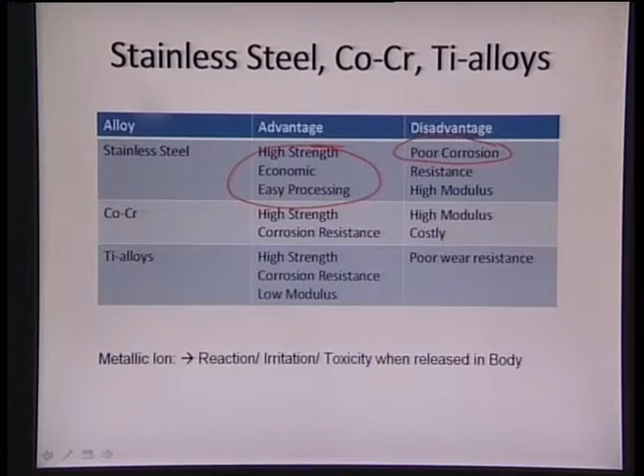As we realized earlier, stainless steel has high strength, is economic, and easy to process, but it has very poor corrosion resistance. That's why we went to cobalt chromium alloys, which have good strength and high corrosion resistance, but are costly and still have very high modulus. If a material has very high modulus, the bone will start thinking it doesn't need to be there, and it will start getting reabsorbed into the body.

So we want a material with a little lower modulus, and that is sufficed by titanium alloys. They provide a good combination of high strength, good corrosion resistance, and low modulus. But the only problem with titanium alloys is that they have very poor wear resistance.

To counteract the poor wear resistance, titanium alloys generally need to be supplied with some sort of surface coating. The surface coating takes care of the wear part, enhancing the surface wear resistance of the titanium implant.

We can also apply a coating that is much more biocompatible in nature, to assist bone integration onto the titanium surface. This coating can be more ceramic in nature, such as hydroxyapatite.

Once the hydroxyapatite-based ceramic coating is applied onto the titanium implant, it can take care of the lower wear resistance of titanium and impart much superior wear properties. It can also provide a base for cells to grow, adhere, and proliferate on the implant surface.

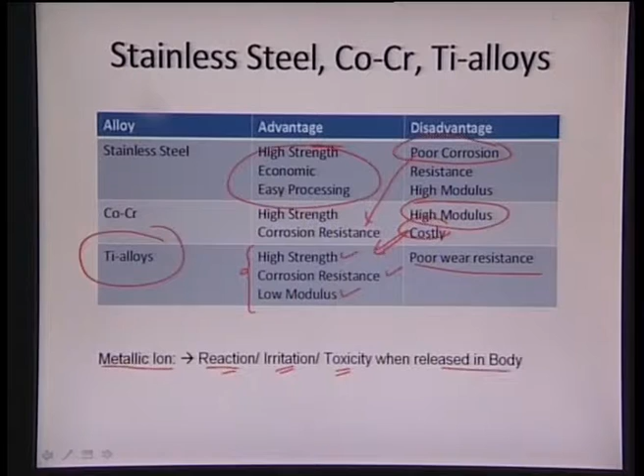There is one more problem with the titanium alloy Ti-6Al-4V: it has a metallic ion concentration that can react, irritate, or induce some toxicity when released into the body. So to eliminate or reduce the effects of this ion release into the body, again ceramic coatings can come to the rescue.

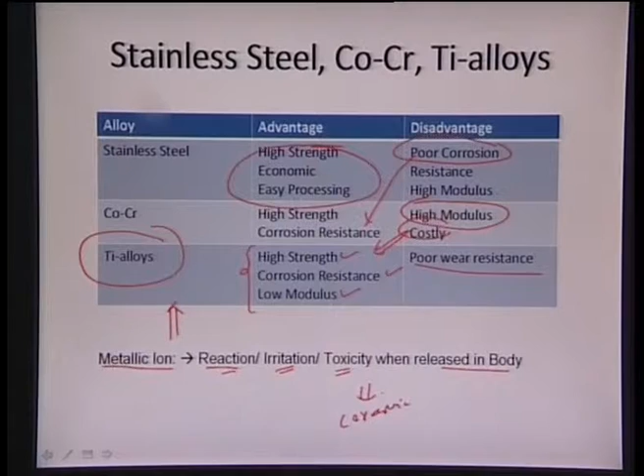Ceramic coatings act as a barrier, and they don't allow the ions to flow easily from the implant surface to the surrounding tissue.

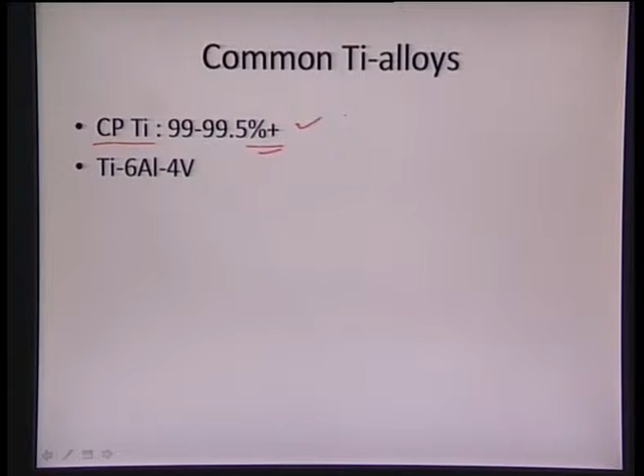The two very common titanium alloys predominant in the medical industry are commercially pure titanium, which is approximately 99% to 99.5%-plus purity, widely utilized in the biomedical industry, and a combination of titanium with 6% aluminum and 4% vanadium, called Ti6Al4V, or Ti6-4 for ease of use. These are the two most commonly used titanium alloys in the biomedical industry.

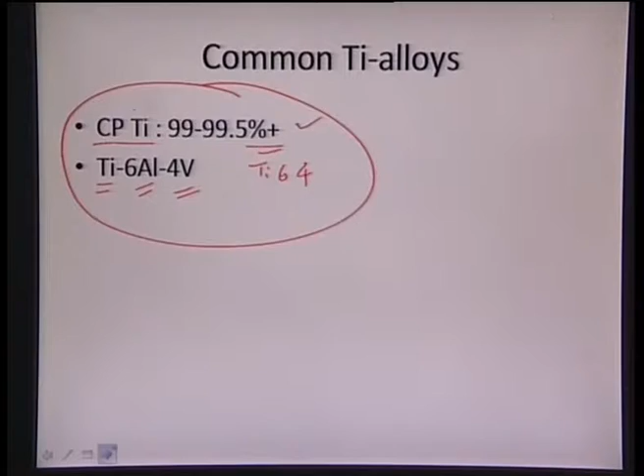Coming to the microstructure, pure titanium is basically HCP, and the phase is called the alpha phase. So pure titanium is more of a single phase material, and it's HCP. Owing to the limited HCP slip planes available in an HCP crystal, it has very limited processability due to the limited number of slip planes, so it is generally very difficult to process as such.

This titanium alloy is generally cold worked to achieve grains in the order of 10 to 150 micrometers in size. Ideally, we can get a single phase structure in titanium alloy, and to induce more strengthening, we go with cold working—approximately 30% cold working is given to the titanium alloy to achieve grains of 10 to 150 micrometers in diameter.

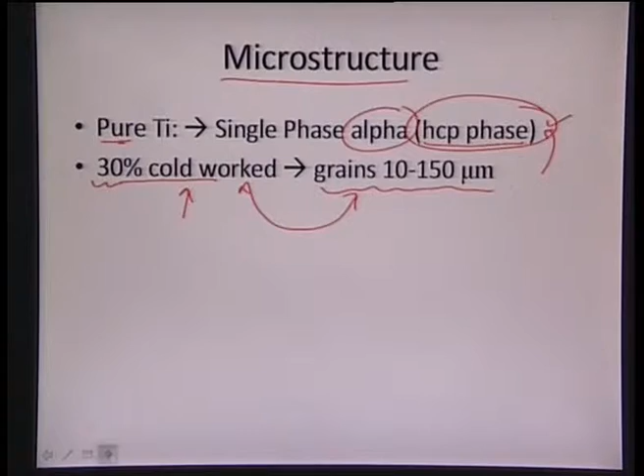There can be addition of secondary interstitials into the titanium, which can be oxygen, nitrogen, or carbon. They go into the interstitial sites of the titanium, giving various combinations. There are certain grades that differentiate the titanium alloy.

These grades go from grade 1, grade 2, grade 3, grade 4, depending on the oxygen content in the titanium alloy. Oxygen can be from 0.1 to 0.4 weight percent, nitrogen up to approximately 0.05 weight percent maximum, and carbon up to 0.10 weight percent into the titanium alloy. The function of all these interstitials is to achieve interstitial solid solution strengthening.

So we can see that once carbon, oxygen or nitrogen sit in the interstitial sites, they induce solid solution strengthening of the titanium alloy. It has also been observed by researchers that nitrogen shows approximately double the effect of either oxygen or carbon. So if nitrogen sits in the interstitial, it will provide much more strengthening effect in comparison to oxygen and carbon.

But at the same time, we can add maximum nitrogen of around 0.05 weight%. So this is the overall effect of the interstitials: oxygen, carbon and nitrogen sit in the interstitial sites, and nitrogen shows approximately double the effect of oxygen or carbon in providing interstitial solid solution strengthening.

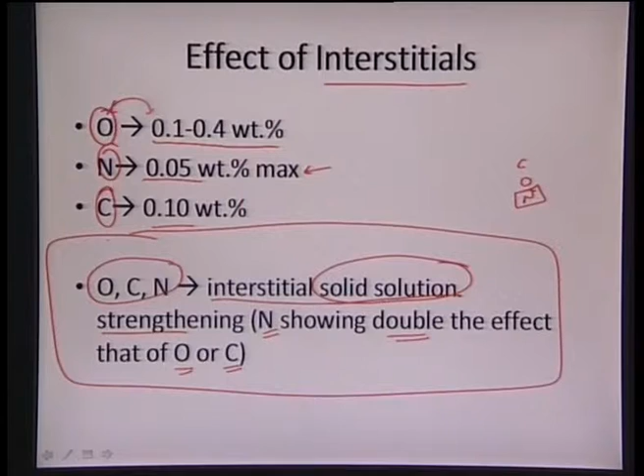Oxygen is also very predominant in terms of enhancing the mechanical properties. If we increase the oxygen content from 0.18 to 0.4%, the yield strength will increase dramatically from 170 to 475 MPa. So approximately more than 2.5 times improvement can be shown in yield strength just by doubling the oxygen content. That is the approximate dependence of oxygen content in the interstitial. So once we have titanium, if we start inducing oxygen to a larger percentage, it will enhance the yield strength.

At the same time, if we increase the oxygen content from 0.085 to around 0.27 weight%, we will also see an increase in the fatigue strength, increasing approximately from 88 to 216. So it is also showing that if we increase the oxygen content approximately double or triple, the same type of effect we can see in the fatigue strength as well.

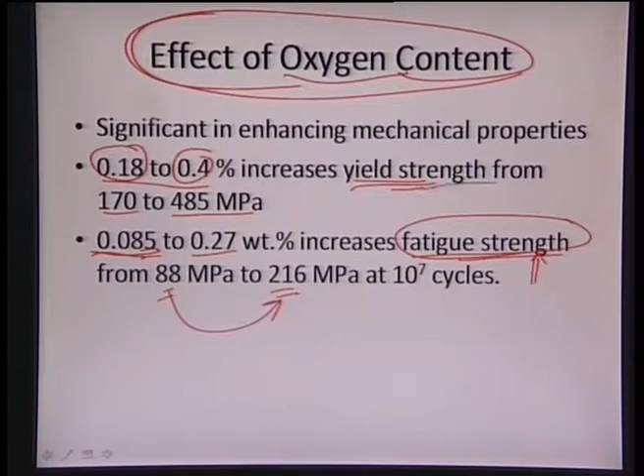So we can realize that higher oxygen content is much useful in terms of increasing the yield strength, and at the same time increasing the fatigue strength, because those sites act as high energy regimes, and it becomes difficult for slip to occur, which basically provides an increase in the yield strength or the fatigue strength of the particular titanium alloy.

The corrosion resistance in the titanium alloy comes because of the presence of this titanium oxide layer. This titanium oxide layer provides a barrier for the surface to interact with the titanium implant, and it is responsible for rendering the corrosion resistance at the tissue level.

Because of its similarity, it can allow cells or tissues to grow on its surface without inducing any toxic effects. That biological compatibility is available even at the molecular scale or even at the tissue level, so that tissues find a very friendly environment on the titanium oxide surface, because it is no more titanium - titanium is basically covered with an impervious layer of titanium oxide.

So there is no release of titanium ions through this titanium oxide, and the titanium oxide is much more bio-friendly. It's very bio-inert in nature, and does not induce irritation or toxicity effects into the cells or tissues. So cells and tissues find a very comfortable environment in terms of their adhesion, their growth, and their proliferation.

So that is the advantage we achieve from the titanium oxide layer: it imparts much corrosion resistance even in very severe body fluid environments, and it can also impart much biological compatibility both at the molecular level as well as the tissue level.

Researchers Kasemo and Lausmaa also found that titanium oxide assists osseointegration in oral and maxillofacial implants. So that is also observed about titanium oxide, that it is much more bio-friendly in nature, and it allows osseointegration in oral and also maxillofacial implants.

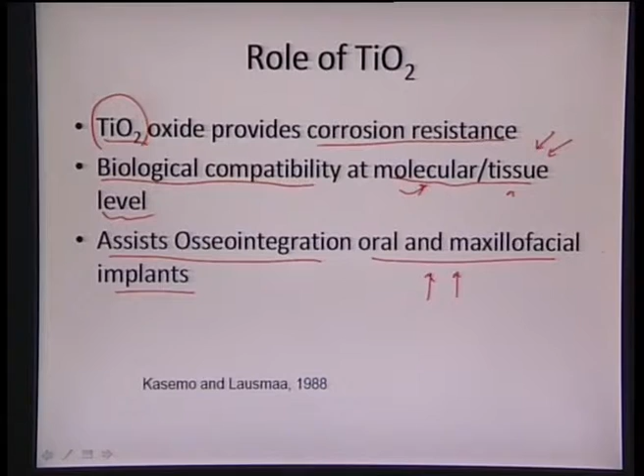Coming to the titanium alloy, generally titanium itself is not that strong in nature, so it also needs certain reinforcement, because titanium is a single phase material. If we start making it a dual phase material, instead of having only the alpha or HCP phase, and induce a secondary phase, we can also get strengthening from the secondary precipitate, because it will impart impediment to the dislocation motion.

It can also generate some new slip systems which can be available for the slip to occur, and in that manner it will enhance its ductility. So the processing part is basically enhanced, and at the same time the strength part can also get enhanced because of the dual phase microstructure.

So in the titanium alloy, we have base as titanium, and generally this is called titanium 6 aluminum 4 vanadium. We generally see aluminum between 5.5 to 6.5%, vanadium between 3.5 to 4.5%, and we have some secondary reinforcements as well, such as iron, carbon, oxygen, which also impart strengthening in terms of increasing either the yield strength or the fatigue strength.

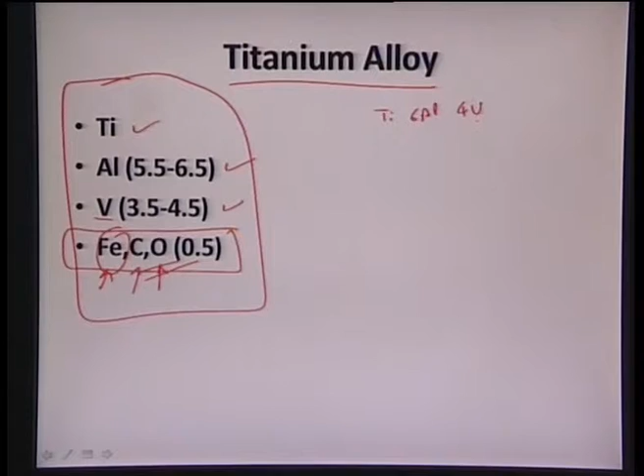So that part can also be achieved from interstitials such as carbon and oxygen. We can also have other reinforcements such as iron, nickel and so on. But overall this titanium alloy is also called titanium 6 aluminum 4 vanadium. It is a very popular material as a biomedical implant material, consisting of aluminum around 6%, vanadium around 4%, and the rest being carbon, oxygen and so on.

As said earlier, the role of additions go on to titanium 6 aluminum 4 vanadium. It forms a dual phase microstructure. Alpha comes basically from the titanium part. At the same time, alpha is also being stabilized by aluminum, so aluminum acts as an alpha stabilizer, rendering the HCP phase much more stable. But the presence of vanadium helps in forming a beta phase. So titanium 6 aluminum 4 vanadium is a combination of alpha plus beta phase.

Instead of having a single phase like in case of pure titanium, which was only alpha, in this case we have a dual microstructure. We see certain pockets are only beta, so we can see alpha plus beta regions, this is beta and this is again alpha.

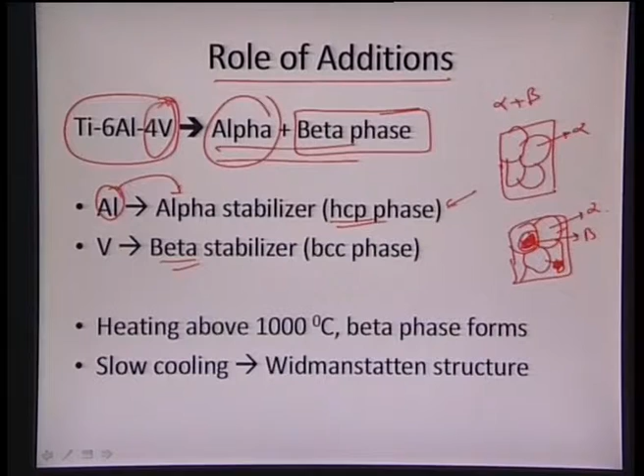This dual phase microstructure assists in achieving even higher strengths and very high fatigue strength. That is the advantage of inducing secondary alloying elements such as aluminum and vanadium, to impart much more increase in the yield strength and fatigue strength of a titanium alloy.

One more thing that happens with titanium 6 aluminum 4 vanadium is that once we heat it above 1000 degrees centigrade, we see the formation of beta phase, because beta phase is stable at higher temperature. So above 1000 degrees centigrade, we'll see a microstructure that is 100% beta.

Once we start cooling it very slowly, the material is basically retained at very high temperature for a long time and cools down very slowly. So there is much more increase in the grain size. That is the problem with slower cooling, we tend to see something called the Widmanstätten structure.

In the Widmanstätten structure, we basically have a structure like this. I'll draw it here: initially we have only beta grains once it is heated at higher temperature, greater than 1000 degrees centigrade, completely 100% beta. As soon as we start cooling it down slowly, we observe increased grain size, and after a certain temperature below 1000 degrees centigrade, we see the nucleation of alpha phase as well.

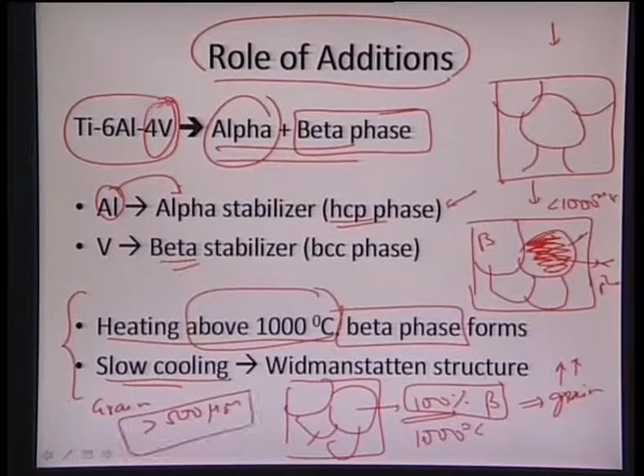So though it has certain advantages in terms of its additions, this slow cooling induces some deleterious effects in this material, and the grain sizes can basically be more than even 500 microns. At this particular grain size, the mechanical properties will be very inferior because of the Hall-Petch relationship, since our grain sizes are on the order of more than 500 microns.

So the overall mechanical properties, such as yield strength, will be very inferior. That is the overall negativity which can be induced just by processing itself, because we are taking the material to very high temperature, more than 1000 degrees centigrade.

We are letting the beta stabilize, and then we allow the alpha phase to form in equilibration. We do a very slow cooling, and because of that the grain size extends to a very huge extent, maybe up to more than 500 microns. This nucleation causes HCP phase to form, which is alpha, which is more like a needle-like structure, and that induces this negative effect.

So we can see this Widmanstätten structure. It is basically the HCP alpha phase, which is aluminum rich, and when depleted in the vanadium part, it starts precipitating as a plate or needle.

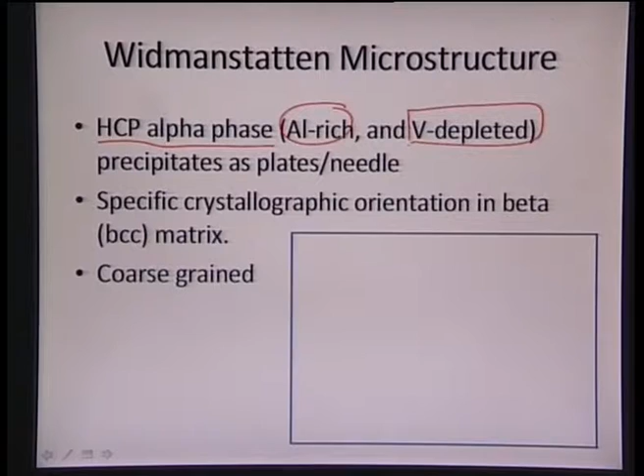So we see that we had grains like this for the beta, and then we see the nucleation of this alpha phase, which can start nucleating within like this, and then we have this beta phase, and again we will see alpha phase nucleating, because alpha phase will be much more stable at less than 1000 degrees centigrade.

We will see more grains which are forming alpha now. So we will have much more regions which have started forming alpha, and then the original beta regions which were present because we had taken the material above 1000 degrees centigrade. So this is the initial beta, and then we start seeing the formation of alpha structure.

This alpha is much more needle-like, and that induces specific crystallographic orientation in beta. So this alpha is forming by precipitating in particular crystallographic orientation. That is the reason it comes more like a needle-like structure, forming within the beta grain. So we have alpha getting precipitated in certain directions of the beta phase.

So that's what is being observed here, and it is again a coarse grained material because the material has stayed for the whole heat treatment for a couple of hours. So that is the problem with this particular material.

We are taking it to very high temperature, letting it stay there for much time, and then doing a very slow cooling. That is the reason the material undergoes higher thermal exposure for a very long time, and that is the reason the grains remain very coarse.

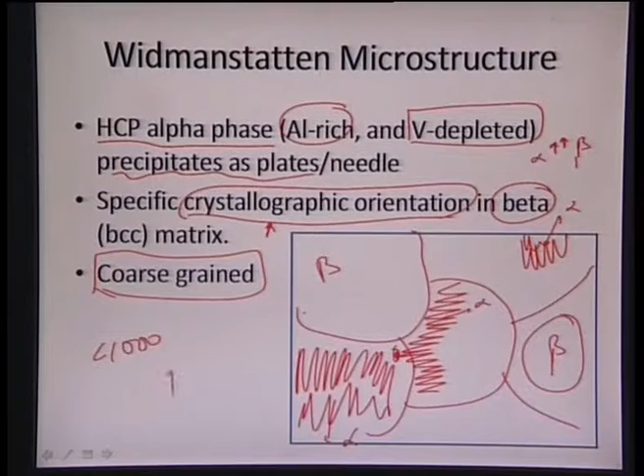So to avoid that particular part, what can be done? We can do a rapid cooling, which basically induces martensitic or bainitic type solid state transformation, and since we have very rapid cooling, we can also achieve a very fine microstructure.

So that is the advantage with this rapid cooling: instead of a very coarse Widmanstätten structure, we are seeing a martensitic or bainitic type solid state transformation. At the same time we are able to achieve a very fine microstructure, so we are not staying at the high temperature regime for very long time.

So temperature is not high anymore, we are doing a very rapid cooling. We go to in excess of 1000 degrees centigrade, but we cool the material very rapidly, and that rapid cooling induces martensitic or bainitic type solid state transformation, and again rapid cooling also induces very fine microstructure.

And again the alloy is heated or cooled below the beta transition. So we are not letting this material go above 1000 degrees centigrade, we let this transition happen below 1000 degrees centigrade. So we are heating the material to less than 1000 degrees centigrade.

So we don't allow the beta to form completely. Once beta is not formed completely, rapid cooling can induce martensitic or bainitic type transformation, and at the same time we are not allowing the grains to get coarsened. So grains remain fine and are retained as such.

So we are not letting the grains get coarsened, because we are basically heating them much below 1000 degrees centigrade, and then they are annealed to give a very fine microstructure. In this particular case, we have isolated beta in alpha matrix. So that is what is happening now.

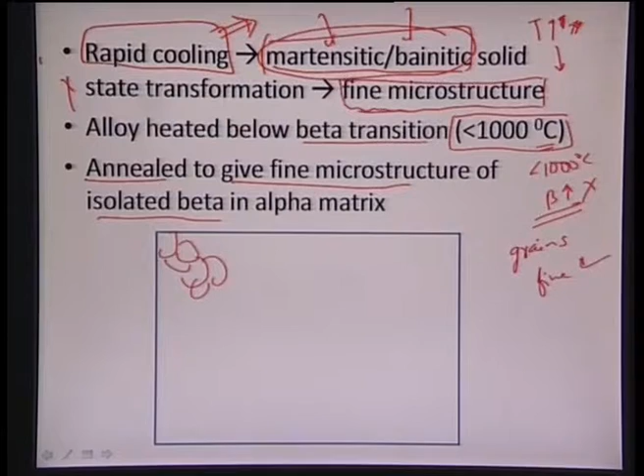We are not letting the beta form to a large extent. So we see very fine grains which can form, and these fine grains are to the order of around 10 to 20 microns. So instead of going up more than 500 microns, they are no more 500 micrometers in diameter, they remain in the 10 to 20 micrometer regime.

And once we have this fine alpha regime, we have alpha grains, and we see that the beta is forming within it. So we will see some beta forming here and there, but it is again scattered. It is again very fine.

It is fine, to the order of maybe 1 to 5 microns or so. This alpha is very fine because the grains themselves are around 10 to 20 micrometers. The beta, which is getting nucleated at high temperature, is again very fine and scattered throughout. So we see a very homogeneous structure.

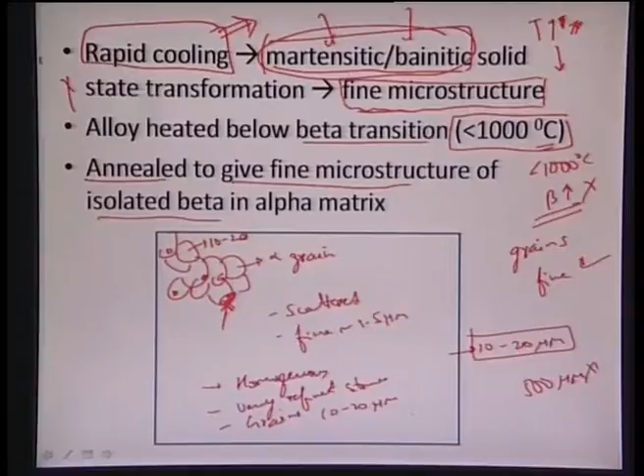Homogeneous, again very fine or refined structure, and grains are to the order of 10 to 20 micrometers in diameter. So these are certain advantages we are getting here: we let the material heat, but not above 1000 degrees centigrade.

We keep the material lower than 1000 degrees centigrade, then do annealing or rapid cooling. Rapid cooling basically retains those fine alpha grains, and we see some precipitation of beta grains within the alpha grains. So we have alpha grains now in the order of 10 to 20 micrometers, and beta is getting precipitated here and there, with the precipitated beta size again a couple of microns.

Overall what we get is a very uniform structure, a very nicely dispersed beta in the alpha matrix, and now we don't have any segregation or Widmanstatten structure anymore. The grains themselves have now a limited size of around 10 to 20 micrometers. So overall properties grow multifold because of the absence of negative structures, such as the Widmanstatten structure or coarse grain.

So the fine grained materials also now induce the Hall-Petch relationship. Because of the Hall-Petch relationship, we can get much superior mechanical properties, as stated in the earlier lecture.

One thing we see is that in titanium alloys, the Young's modulus doesn't change much even with certain additions. For commercially pure titanium, cold worked to around 30%, we see yield strength to the order of around 485, tensile strength of around 760 MPa, and fatigue endurance limit of around 300.

But as soon as we start adding alloys, like in titanium 6 aluminum 4 vanadium, and that material is forged, annealed, and heat treated, once it is annealed we can see an increase in yield strength to up to around 900 megapascals, tensile strength of around 1000 MPa, and fatigue strength almost doubled, at 10 power 7 cycles.

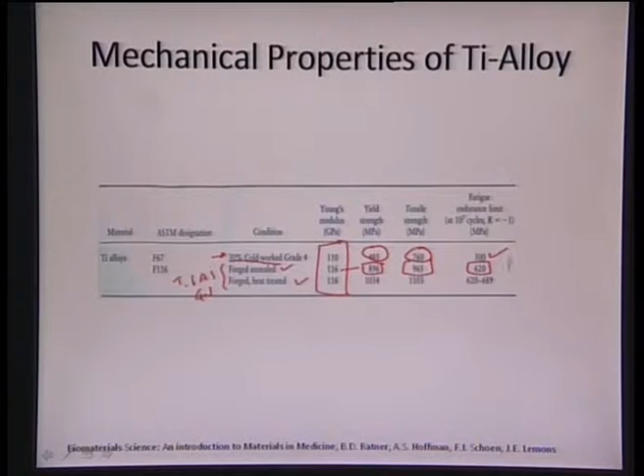Again, controlled heat treating can increase its yield strength to around 1034 megapascals, which is more than a gigapascal. Tensile strength is also increased to a certain extent, around 1.1 gigapascals, and fatigue strength is also increased. So we can see how heat treatment can be utilized in processing titanium alloy to achieve enhanced mechanical properties.

So that is what it is. Like titanium alloy, we are seeing certain properties. Once we add 6 aluminum 4 vanadium, we see a dual phase microstructure, and that dual phase microstructure is assisting in the increase of yield strength, almost 2 times.

And then again controlled heat treatment can increase the yield strength by that same factor, and the fatigue endurance limit can also be increased by around 2 times. That is the way we can manipulate the properties of titanium alloy via secondary additions, as well as by performing heat treatment.

So those are the advantages of utilizing titanium alloy and performing heat treatment, because we can achieve very superior yield strength, tensile strength, and fatigue strength. Though the Young's modulus remains approximately similar and doesn't change much, the enhancement in yield strength, tensile strength, and fatigue strength is just phenomenal.

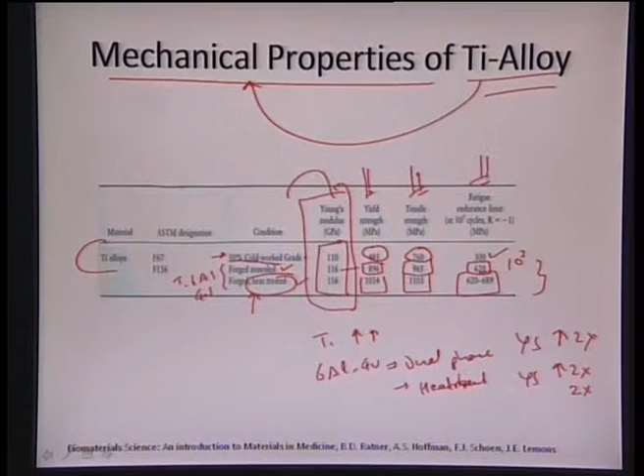Again, as we learnt earlier, titanium alloy has very poor wear resistance. At the same time, if we want a very high superior fatigue property, it is basically more of the implant which takes the load and undergoes much more wear and tear in terms of taking the impact and the fatigue.

Because ceramics are very brittle in nature, they cannot take much load or fatigue. They don't have good fatigue property because they are ceramic, so they don't have enough yielding which can happen in the material. So we see that the fatigue property is much more dependent on the titanium alloy.

So fatigue property is more dependent on the implant, or the titanium alloy which forms the implant. To improve the fatigue property, it is only the titanium alloy which is responsible. So we need to perform certain controlled heat treatments, as we saw earlier, taking the material below 1000 degrees centigrade. The yield strength and fatigue strength then increase to a large extent in comparison to titanium itself.

If you are utilizing commercially pure titanium, it might have fatigue strength of around 300 megapascals at 10 power 7 cycles. But if you take a titanium alloy and properly heat treat it, it can have up to 600 or 700 MPa for the same life cycles. This tells us that we have to utilize a superior grade of titanium if we want to achieve very high or enhanced fatigue properties, because that is mostly dependent on the implant, since the implant is the one which has to take the overall load.

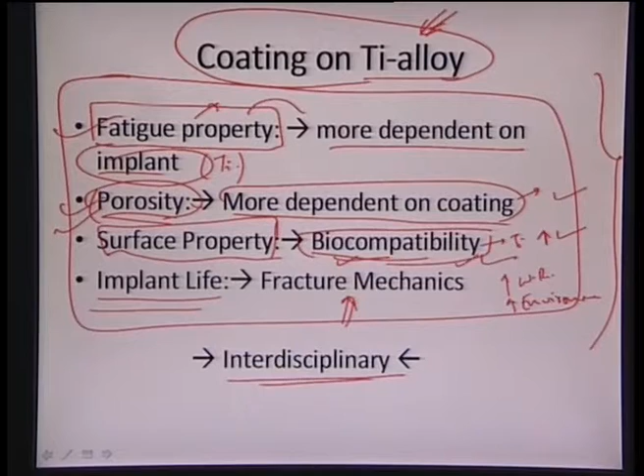So all those parts make this particular study interdisciplinary in nature, and that's what makes it much more complicated. And now coming to the wear of implants.

Seeing that it is multidisciplinary in nature, wear is also one of the very essential components of designing an implant, because any two joints lying nearby will tend to wear out with time, since movement between the two will cause the material to undergo some wear. Like we have acetabular cups and a ball and socket joint, so we see an overlay between a metallic surface and a polymeric or ceramic surface.

Once we have two dissimilar metals closer to one another, there will definitely be some wear at that interface. Wear of metallic implants is one of the very serious concerns, because once it starts releasing debris while getting abraded or worn out, ions will start getting released into the body. This wear will occur at different joints of the human body.

Once it is implanted into the body, there is hardly any control. So all the debris generated tries to accumulate somewhere, and it's just released into the blood, and that's it. We don't have any control after that.

So we need a material with very superior wear resistance once implanted into the body. We need to ensure that wherever two similar or dissimilar metals come in contact, we design it so that we can reduce or increase the corrosion resistance, or reduce or enhance the wear resistance of those particular implants.

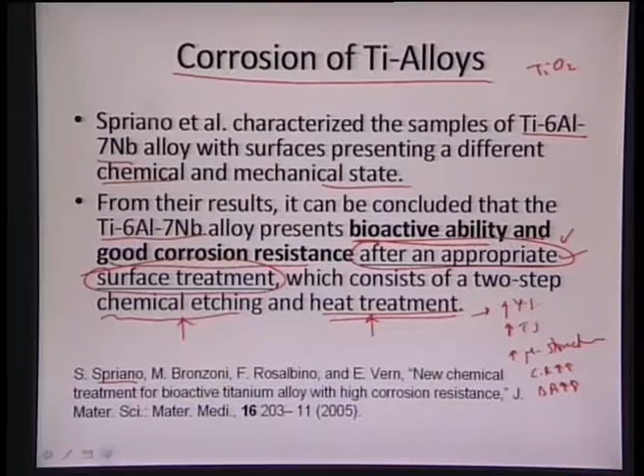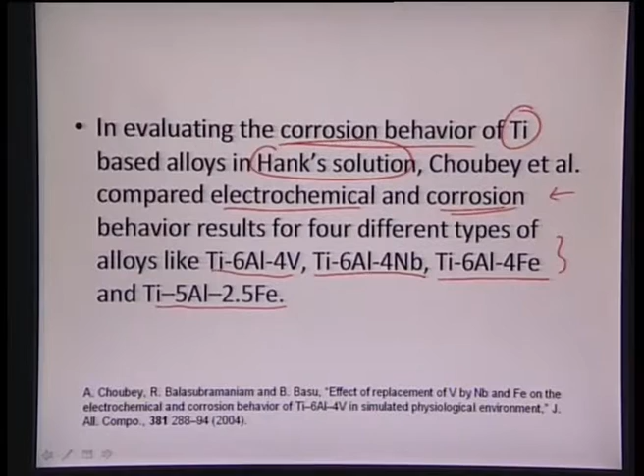There is one more group, Choubey, which has worked on finding the corrosion behavior of titanium based alloys. They took a couple of alloys such as titanium 6 aluminum 4 vanadium, titanium 6 aluminum 4 niobium, titanium 6 aluminum 4 Fe, and titanium 5 aluminum 2.5 Fe. So they have taken four different types of alloys, and basically found their behavior in Hanks solution, comparing the electrochemical and corrosion behavior of all these alloys under different conditions.

At the same time, they also performed fretting wear testing of the titanium based alloys. The fretting wear was done using a 10 Newton load at 10 hertz, for a displacement distance of around 80 microns, going up to around 10,000 cycles, all under simulated body fluid environment. They found that the coefficient of friction for titanium 6 aluminum 4 vanadium lies between 0.46 to 0.5, whereas that of titanium 5 aluminum 2.5 Fe falls around 0.3. The major wear mechanism was found to be tribomechanical abrasion, transfer layer formation, and finally cracking — three steps in total.

It also shows that the coefficient of friction is very high for commercially pure titanium, to the order of 0.5, whereas it decreases marginally for titanium 6 aluminum 4 vanadium, showing a variance from 0.46 to around 0.5. Titanium 13 niobium 13 zirconium showed around 0.48, titanium 5 aluminum 2.5 Fe showed around 0.3, and cobalt 28 chromium 6 molybdenum showed around 0.4 coefficient of friction.

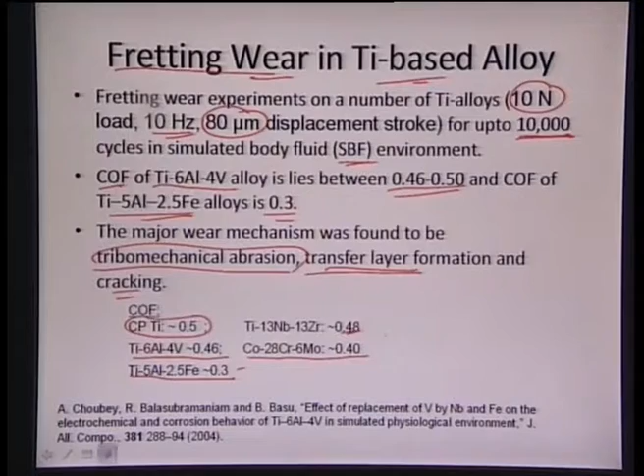Coming back to the corrosion part, the passivation parameters were obtained from potentiodynamic polarization studies, again done in Hanks solution at 37 degrees centigrade. They found the passivation behavior around the zero current potential (ZCP), with various values for the different titanium alloys. The region between the breakdown potential and the zero current potential is the regime where the material remains much more stable or passive. So this stable passive region is defined between the zero current potential and the breakdown potential. By comparing all four alloys, we can realize which material is much more stable in nature.

Based on that, we can also approximate the passivation current density, which is very high for titanium 6 aluminum 4 vanadium, but marginally about half compared to the other alloys. That is what is observed here — the passive range for materials with stable passive behavior is given by the difference between zero current potential and breakdown potential. The breakdown potential is again very high for titanium 6 aluminum 4 vanadium, but approximately comparable for other alloys as well. So all these results are not drastically different, but they are all comparable with one another.

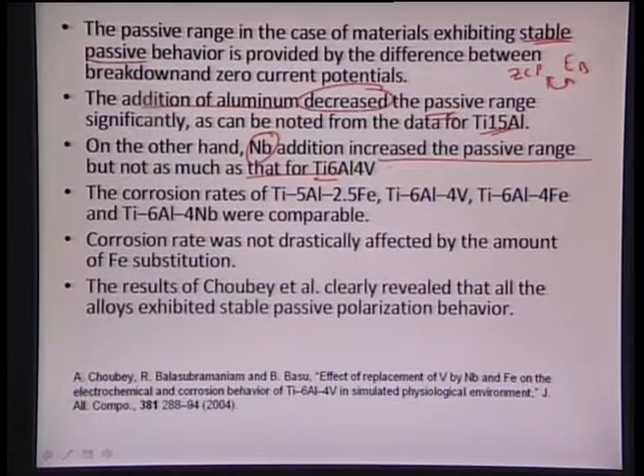But niobium addition increased the passivation range, though not as much as titanium 6 aluminum 4 vanadium. All the corrosion rates for these materials, whether titanium 6 aluminum 4 vanadium, 6 aluminum 4 Fe, 5 aluminum 2.5 Fe, or 6 aluminum 4 niobium, were comparable, as we saw earlier, ranging around 0.5 to 1.5 micrometers per year.

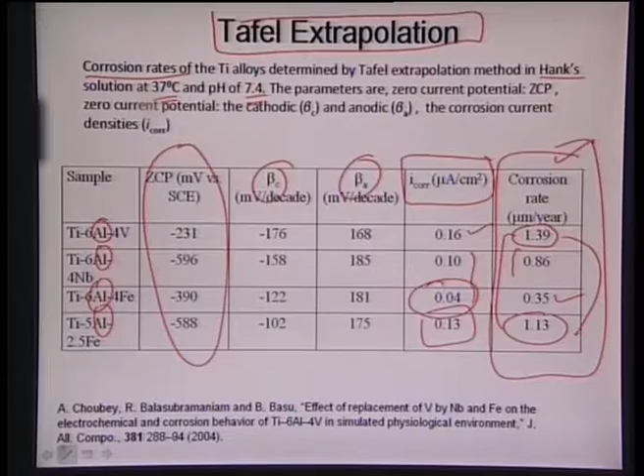Aluminum is basically deteriorating the passive regime, whereas niobium tends to increase the passivation regime, as we can see in this previous case, that once we start adding niobium, we can see much more difference between the two regimes.

Overall, we see that the corrosion rates are not so different for all these materials, even when adding certain iron to it, and they clearly reveal that stable passive polarization behavior exists between zero current potential and the breakdown potential.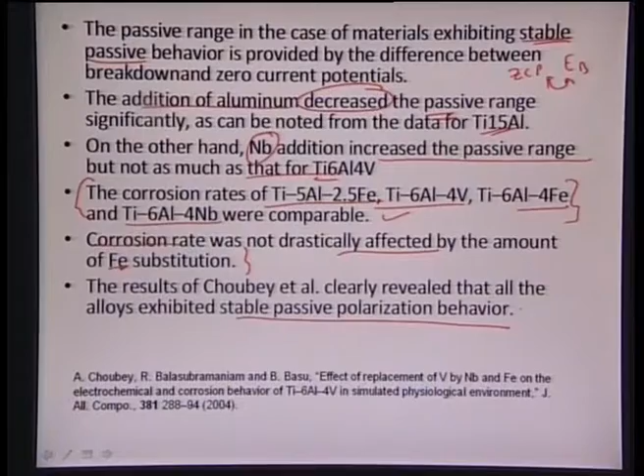Coming back to the titanium alloy, the overall gist is that titanium alloys are mostly HCP in nature, and we tend to add alloying elements such as aluminum, which is an HCP stabilizer or alpha phase stabilizer, and vanadium, which is a beta phase stabilizer or BCC stabilizer.

There are two ways to synthesize this material. We can heat it above 1000 degrees centigrade and let it cool slowly, but that tends to form very huge grains, or precipitate alpha in beta grains, with beta grains very coarse in nature, giving a Widmanstatten structure.

But since the grains have grown to a large extent, and we are getting a needle-like structure, this overall microstructure doesn't appear good, and generally shows very poor strength.

To avoid that, we take the material to less than 1000 degrees centigrade and let alpha dominate in this regime, then we see certain nucleation of beta precipitate, which is BCC in nature, giving a very fine grained structure with nicely dispersed beta in it.

That essentially gives a two-phase microstructure, very fine, 10 to 20 microns, with beta of around 1 to 5 microns in size. This gives a very uniformly dispersed microstructure, superior in mechanical properties in terms of yield strength and fatigue strength.

So heat treatment is a very essential key component in altering mechanical properties. We can increase the fatigue strength by approximately 2 times once we do a controlled heat treatment to the material.